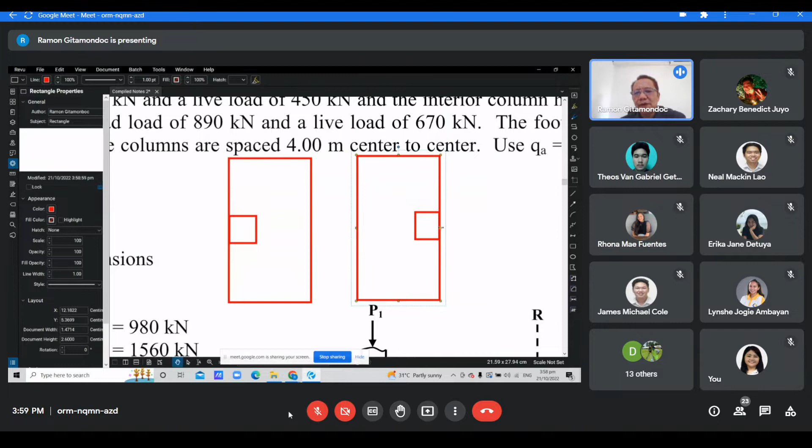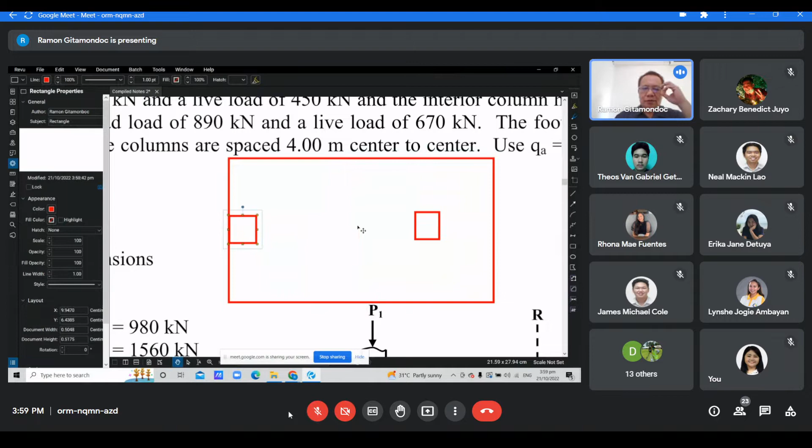So those are at least two situations. Of course there are other situations, but I think that will be sufficient for now. These are the instances, two instances where we use the rectangular combined footing.

So in the problem, design a rectangular combined footing to support the exterior column having a dimension of 400 by 400 with a dead load of 530, live load of 450, and the interior column having dimension 450 by 450 mm, with dead load of 890 and live load of 670. The footing cannot extend beyond the exterior column. Columns are spaced 4 meters apart. Use Q allowable of 180 kPa, f'c of 21, and fy of 414 megapascals.

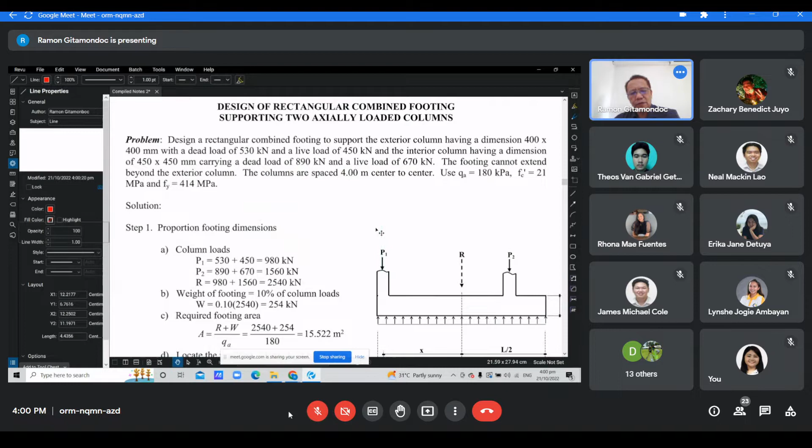So this is the elevation view of our footing. This is the exterior column, this is the interior column, then this is the plan view.

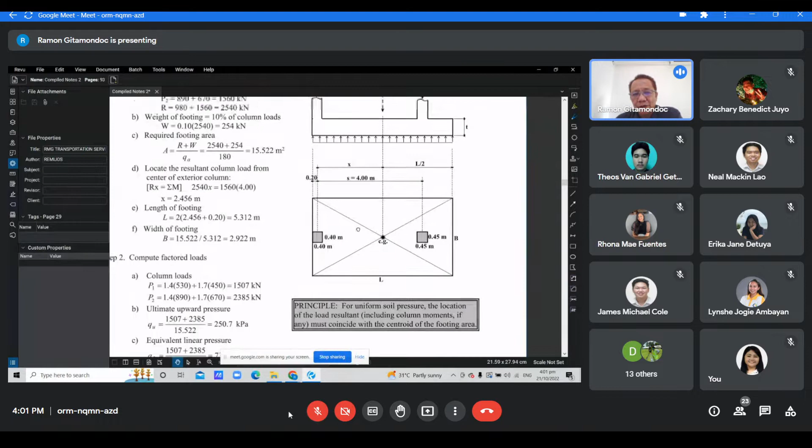Now the basic principle of this, I think I have stated it here: for uniform soil pressure, the location of the load resultant, including column moments if any, must coincide with the centroid of the footing area. So in our example, there is no column moment, just to emphasize, but the same principles will be applied if we have a column moment.

So we simplified this, only axial loads are what we placed in this problem. So P1 and P2, their resultant here, according to the principle, in order for our pressure distribution underneath the footing to be uniform, we just make the resultant column load pass through the centroid of the footing area.

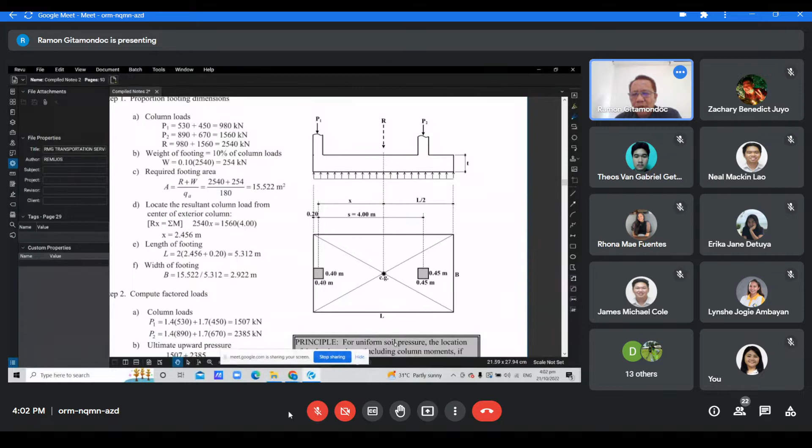However, this requirement, to make the resultant column load coincide with the centroid of the footing area, would not be absolutely necessary. We just apply this condition because we want to produce a uniform soil pressure underneath the footing. Of course, the non-uniform case, if the resultant column load does not pass through the centroid of the footing area, that will cause an uneven pressure distribution, similar to the axial plus bending problem.

So the result would be a consequent complexity in the analysis if our pressure distribution is uneven. Since this is just an introduction to the design of combined footing, we will try to avoid that complexity first. So that's why we proportion this so that our pressure distribution is uniform.

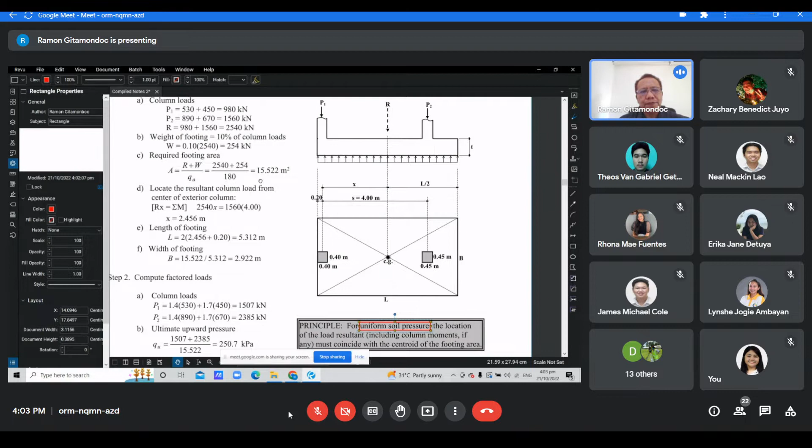So, any questions regarding this principle?

Don't be surprised, a friend and classmate, Engineer Salera, is here. I think you know him, no?

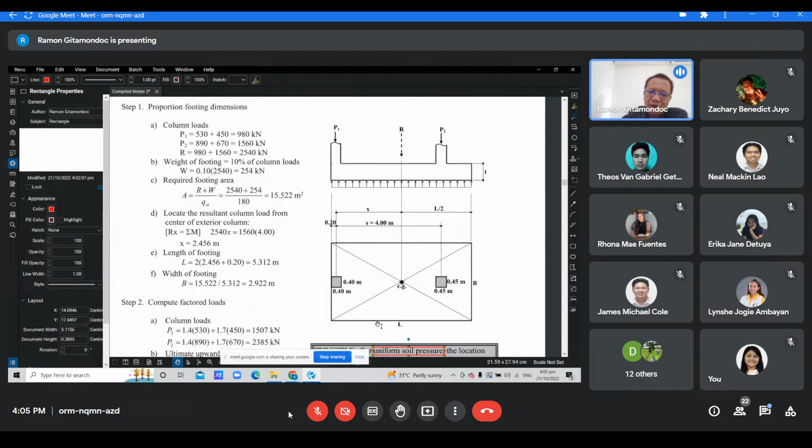Assuming that we have already proportioned the footing based on this principle for uniform soil pressure, the location of the load resultant, including column moments if any, must coincide with the centroid of the footing area. So assume that we already used that principle to obtain the dimension of the footing.

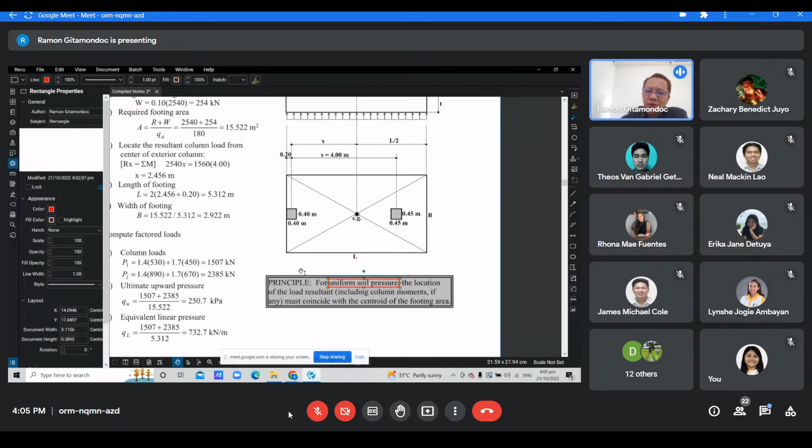So what we do next is, once we convert the service loads to factored loads, we just multiply the load by their load factors. In this solution presented, our load factor for dead load is still 1.4, and for live load, 1.7. Take note that in the more recent edition of the code, these load factors have already been changed.

The dead load factor is now 1.2. The live load factor is now reduced to 1.6.

So once we compute the factored column load, we can compute the uniform upward pressure. We just add the column loads, then divide by the actual area of the footing. Then we convert the uniform upward pressure, which is still in kilopascal, to an equivalent linear pressure in kilonewton per meter along the length of the footing.

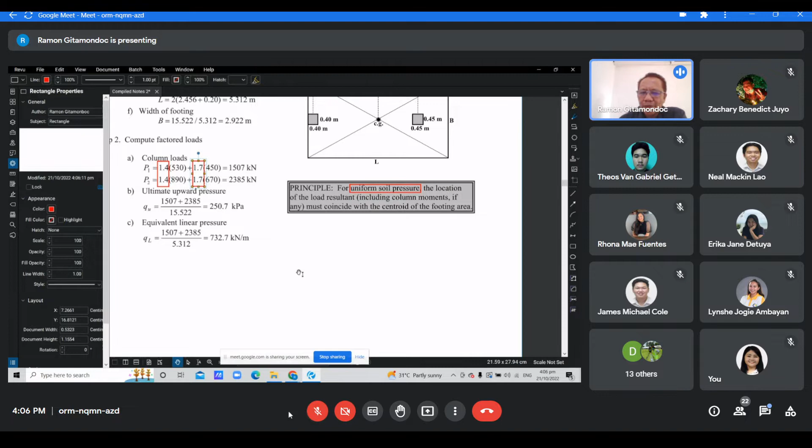So we can multiply 250.7 kPa by the width of the footing, or we can divide the sum of the column loads by the length of the footing. That will give us the same result.

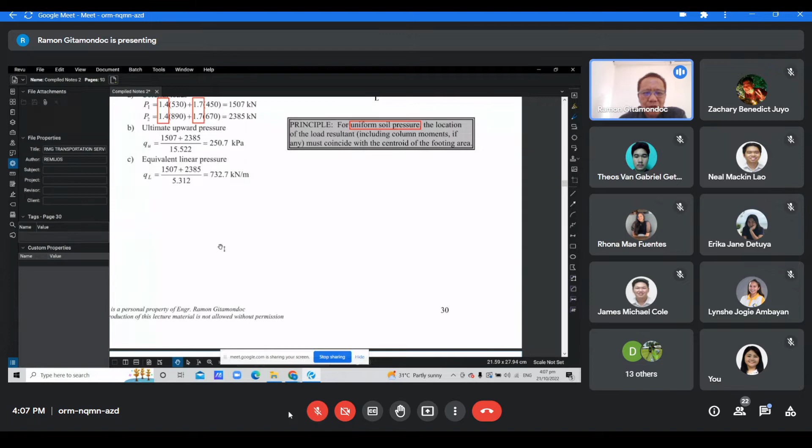So first we analyze here the longitudinal direction, along the length of the footing. After converting the pressure into equivalent linear pressure, we can draw the beam diagram, also called the load diagram. We treat the footing as if it were a beam.

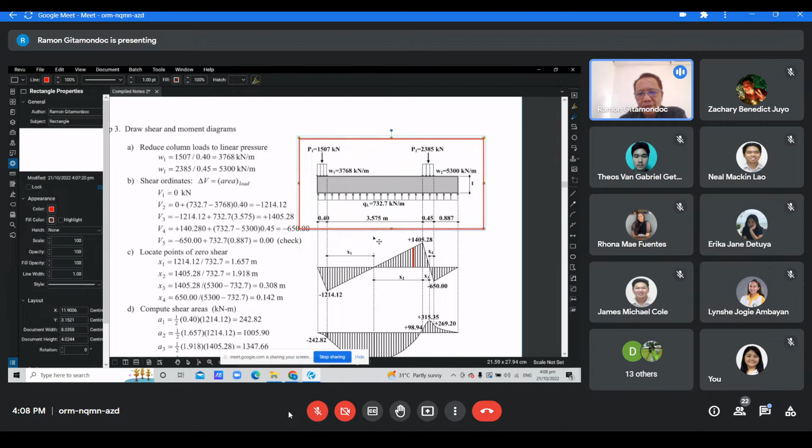So first the load diagram. Then from the load diagram, we have the shear diagram. After constructing the shear diagram, you can also draw the bending moment diagram. Okay?

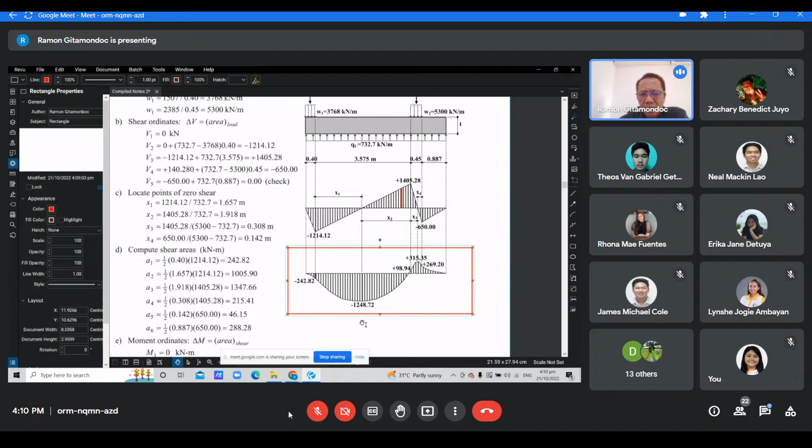Whether you use the shear and moment equation or the relation between load, shear, and moment, it will actually depend on what's more convenient in a particular case. In rectangular combined footing, it's easier to use the area or relation between load, shear, and moment. But in trapezoidal combined footing, I think it's more convenient and direct to use the shear and moment equations. But those are two alternative solutions.

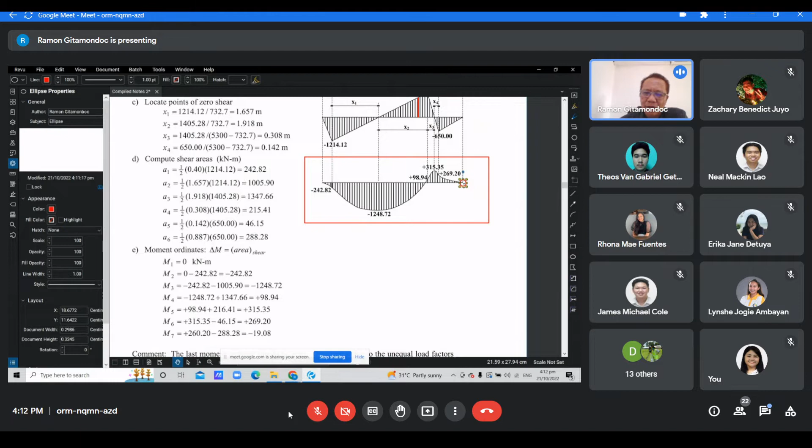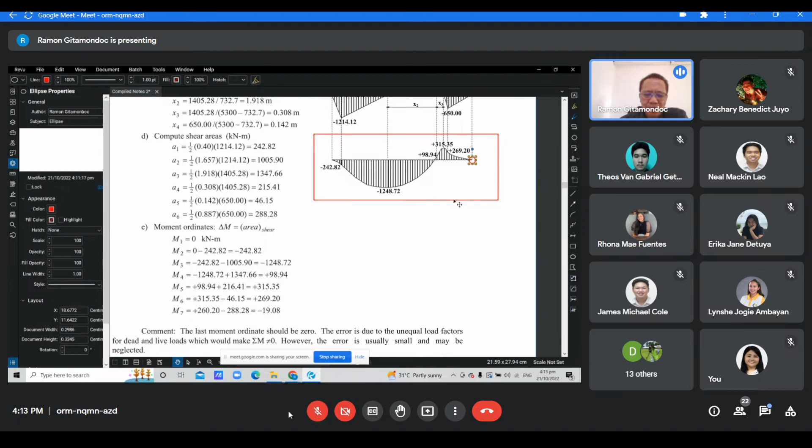If there's an error here, you balance it — you distribute the error to the previously computed moment ordinates. That can be done too, if you want to make it more refined. But as I said, this final error is usually small, so it can be neglected without introducing an appreciable difference in the final result — for example, in the thickness of the footing or the amount of steel reinforcement. Remember that structural design is not an exact science. What's important is that we maintain a reasonable degree of precision in our answer. It doesn't have to be exactly 0-0.

So, any questions regarding this part?

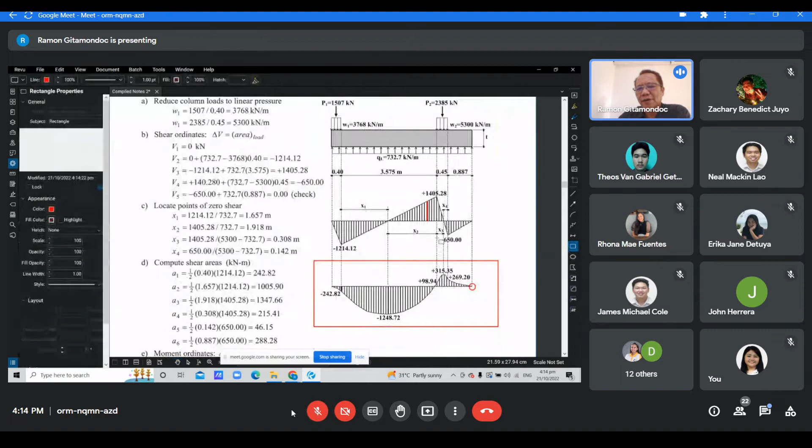Now, in step 4, we compute the depth required for beam shear. Let's go back to our shear diagram. The critical section for beam shear is, of course, at a distance from the face of the column. If we relate this, this region belongs to the exterior column, this one belongs to the interior column region.

So we need to mark where the distance from the face of the column is. On the side of the exterior column, it's the distance to the interior column. So the distance from the face of the column — on the other face, it's the distance here.

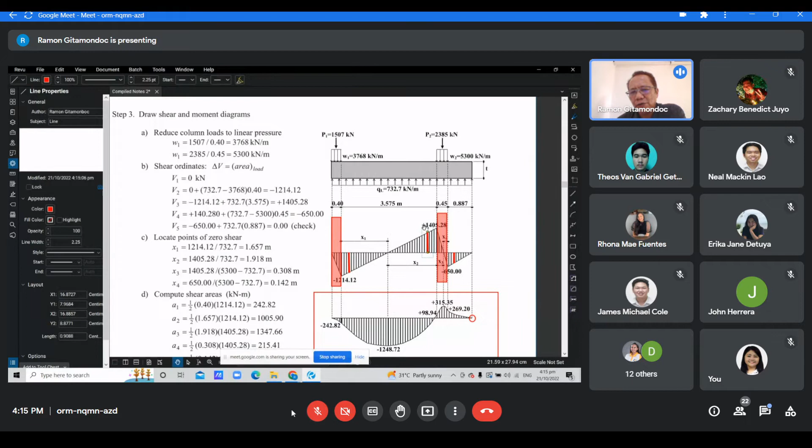So these become the critical sections for beam shear. I think it's obvious that the larger value is near the interior column footing, because you have a higher shear ordinate, 1405.28, at the face of the column. But that's not the design shear — remember that beam shear is always taken at the distance from the face of the column. So we calculate here what the shear force is: this shear ordinate minus the upward pressure times D, because that's the amount by which the shear ordinate will reduce.

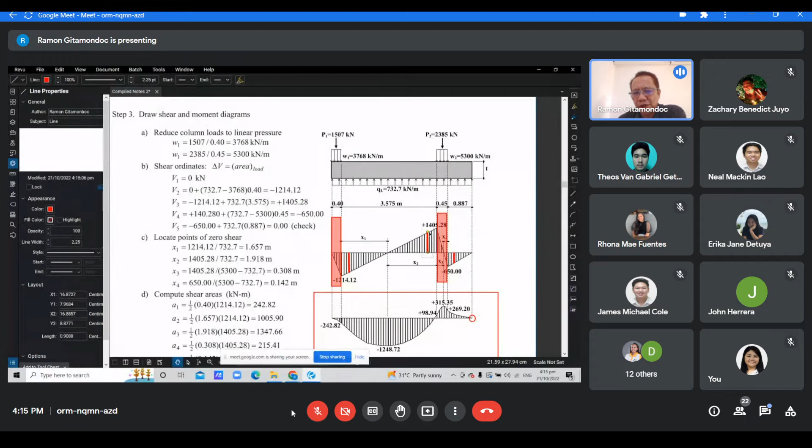So here, for shear capacity, Phi 1/6 square root F sub C prime BD, we equate that to Vu ≤ Phi Vc to obtain D of 0.534. So that's for the beam shear calculation.

Now for punching shear, of course at D over 2 distance from the face of the column, and that would be true both for the interior and exterior column.

So at the exterior column, that's the critical section for punching shear, at D over 2 distance. So to compute the shear force here: downward column load, then minus the resultant upward pressure acting within the tributary area for shear. That's it.

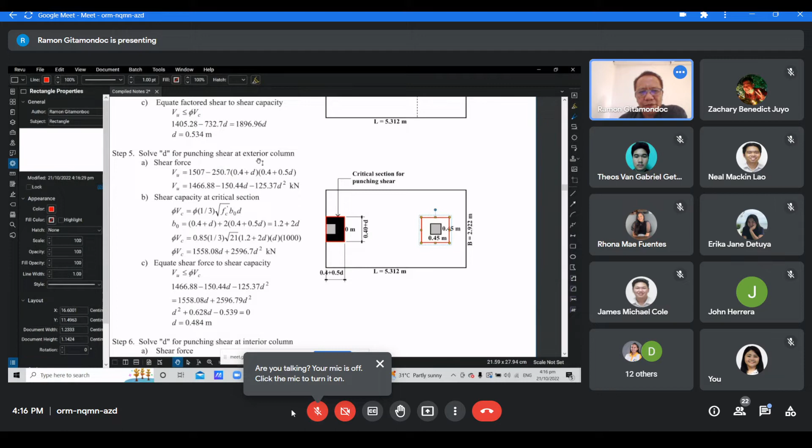So we compute for punching shear at exterior, and we compute for punching shear at interior, and whichever governs is the requirement we use. So for beam shear it's 0.534, for punching shear 0.484 at exterior column, 0.461 at interior column. So the governing value is 0.534.

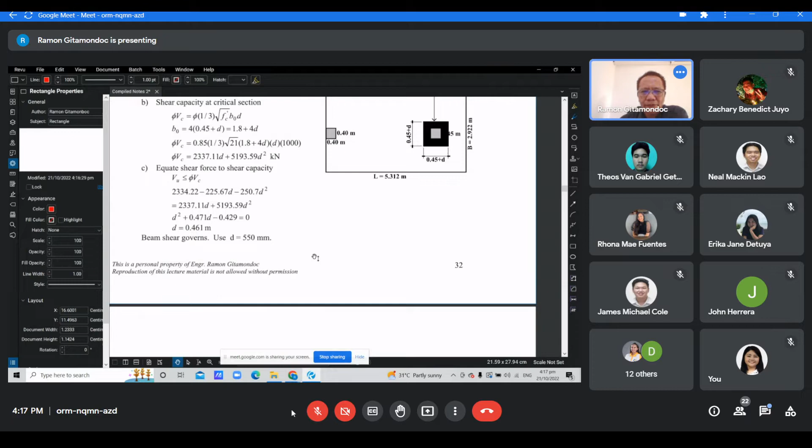That 0.534, rounding off, we'll use 550 mm. That's okay. So after we have the thickness of the footing, the next step will be to compute the steel reinforcement.

Now if you look at the bending moment diagram, you'll see in this region, from here going this way, the bending moment is negative. That means the tension is at the top, and that is where we place our steel reinforcement. Then from this point toward the end of the footing, the bending moment is positive, and therefore tension is at the bottom, and we place the steel reinforcement at the bottom.

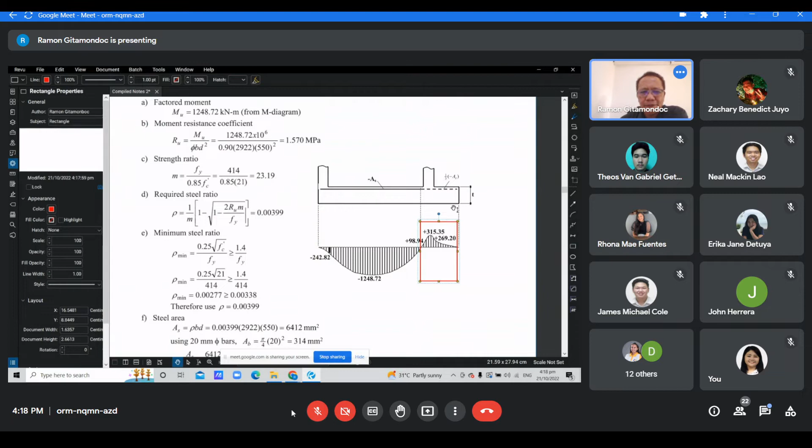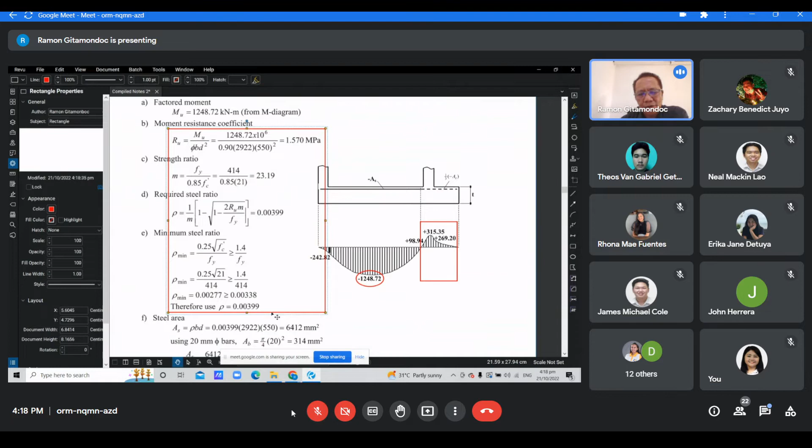So to calculate the amount of steel, we take the maximum moment here. This is a case of: given the design moment, you have the width and the effective depth, then you can compute the amount of steel reinforcement using the formulas you have learned in reinforced concrete design. And this has already been applied several times, even in the previous types of footing we discussed, so no need to go into that in detail for now.

And for positive steel reinforcement, as I said, this region has positive bending moment, but the critical section for bending here, although the maximum bending moment is 315 and that is directly under the column, it's very stiff in the region directly under the column. The critical section for bending will occur at the face of the column. So our design moment is not 315 but rather 269.2. That's what we use here.

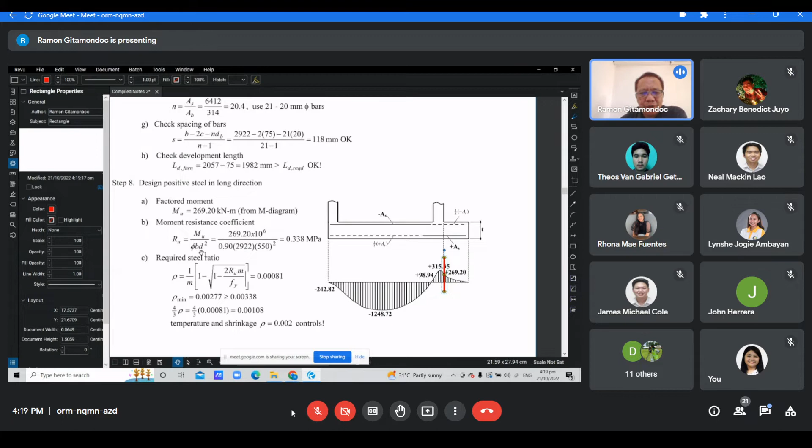And again, if you have the moment, you have the cross-sectional dimensions B and D, then you can compute the required steel reinforcement.

Now for the short direction steel, meaning the steel in this other direction - what we computed earlier was the long direction steel. Now by the way, you probably noticed this: this is the steel required for the positive moment.

And this will also serve as chairs for the short direction steel, so that they form a grid together.

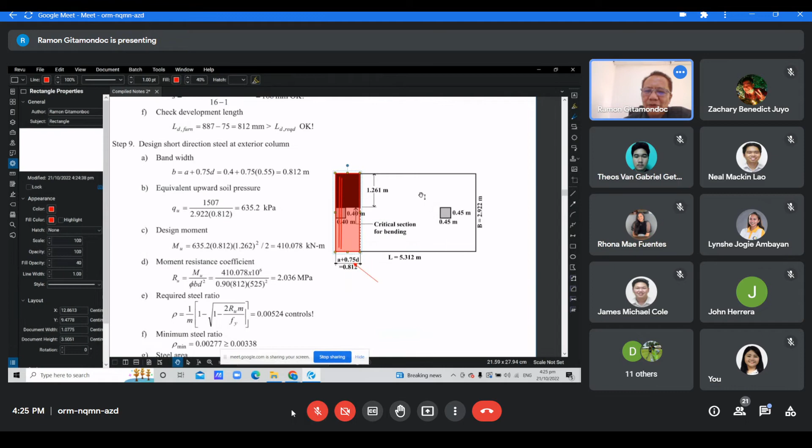To determine the steel reinforcement there, we consider that this column is supported only within this tributary width. So the column load divided by this reduced area will give you a somewhat large amount of pressure, and you treat this as though it were an isolated condition for that portion. So the critical section for bending will be at the face of the column.

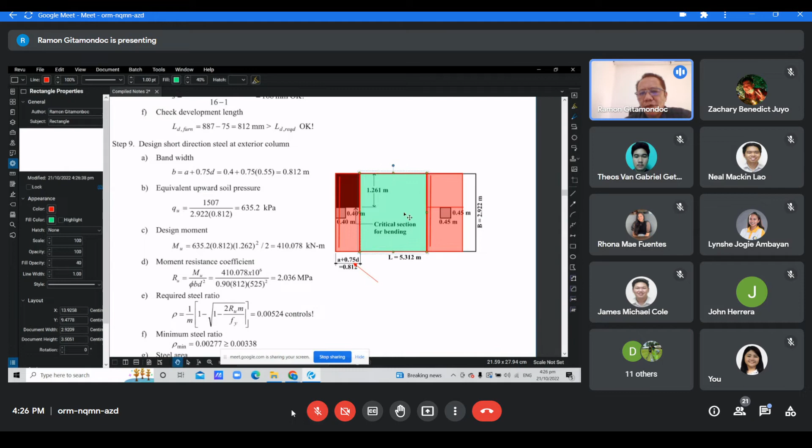So we design the transverse direction steel within this bandwidth and within this other bandwidth. Then for the remaining zones, we just supply minimum steel reinforcement. So for our remaining zone, this region here I will highlight with color green. This region here, maybe there's a small leftover in this other region.

So there's really no difficult principles or concepts that we're applying here except what we've already learned, I think. The only new thing here is computing the transverse direction steel where we consider a bandwidth.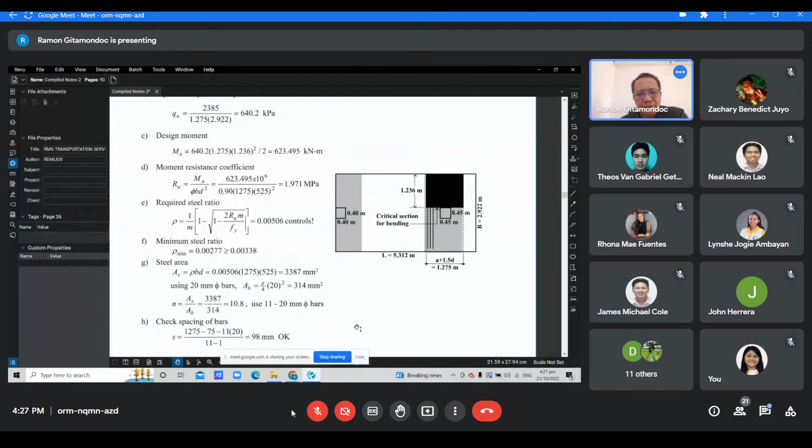So the dowel calculation would be optional. If we embed all the column rebars into the footing, then we don't have to compute these dowel requirements.

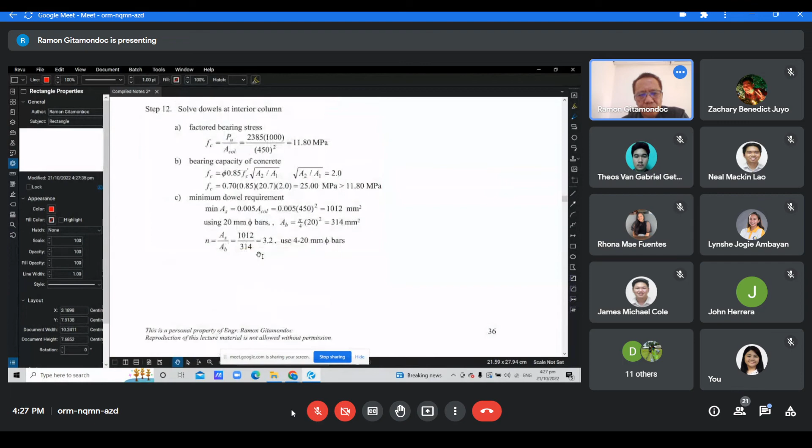And of course, we have checking for the development length. Then step 14, we check the weight of the footing because initially we assumed it. Now that we have the size of the footing, we can compute the actual weight and just compare it to the assumed weight. Usually, in my experience with calculations, it does not vary significantly. If you assume 10 to 12% of the combined column load, it will usually be close to the actual weight.

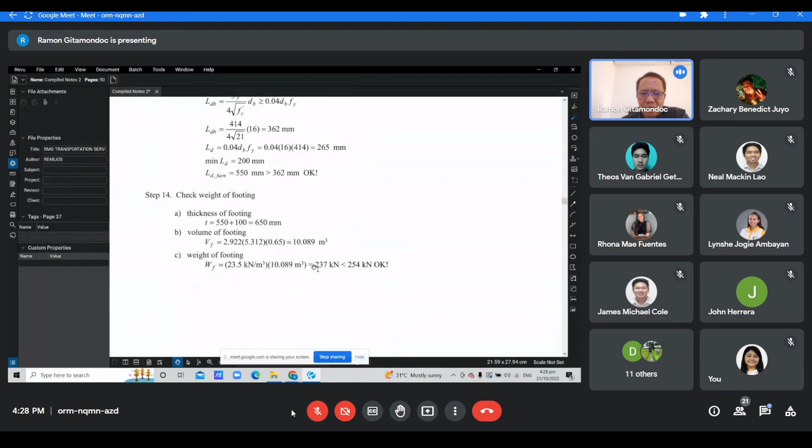So the final output is the details. All the results of our calculation, we have to translate into design drawings. This is the guide on how to make the drawing - what information is needed first, so that the footing can be constructed according to our intention.

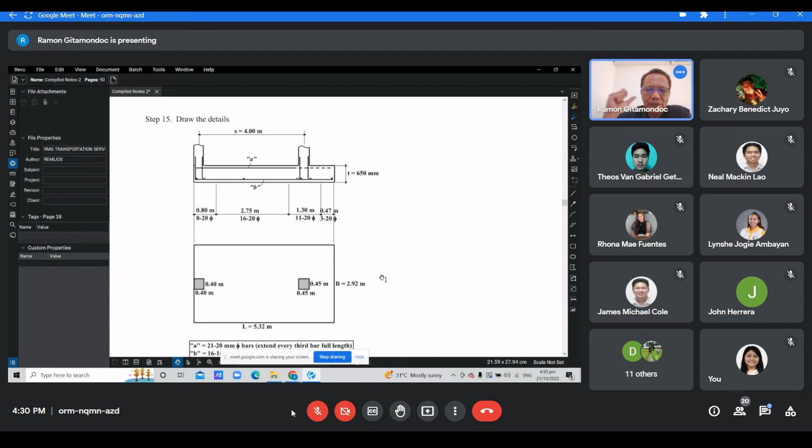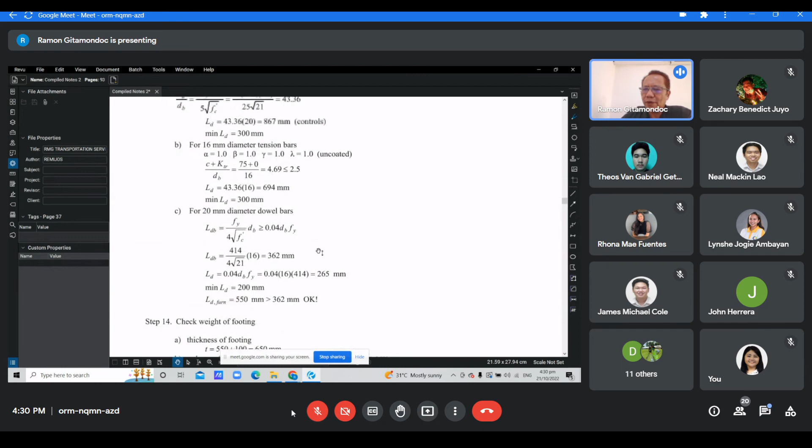Camille, are you still the vice president? Yes boss. Oh so you're still vice president? So that's left now, seems like it's been reduced. But vice president, that is a very important role and dignified role in your batch.

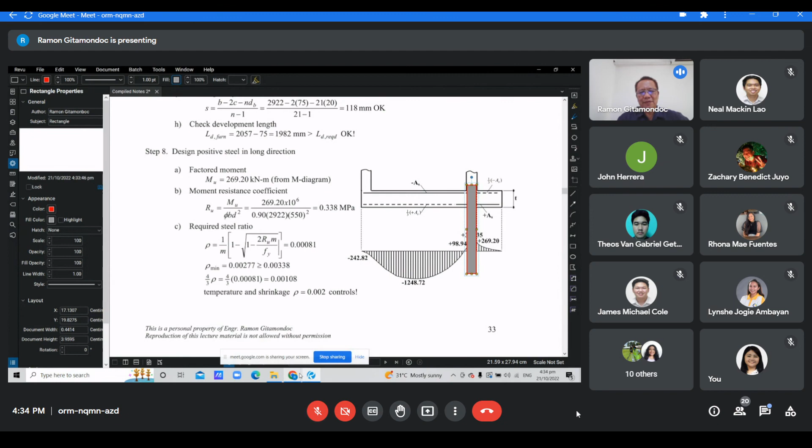So what else? Good afternoon sir. Just to clarify on your answer to Neal - if the rectangular footing extends to the other side, if it's negative on that other side, should I consider the corresponding critical section similarly? Or positive, sorry. Oh that's possible. Okay, thank you sir.